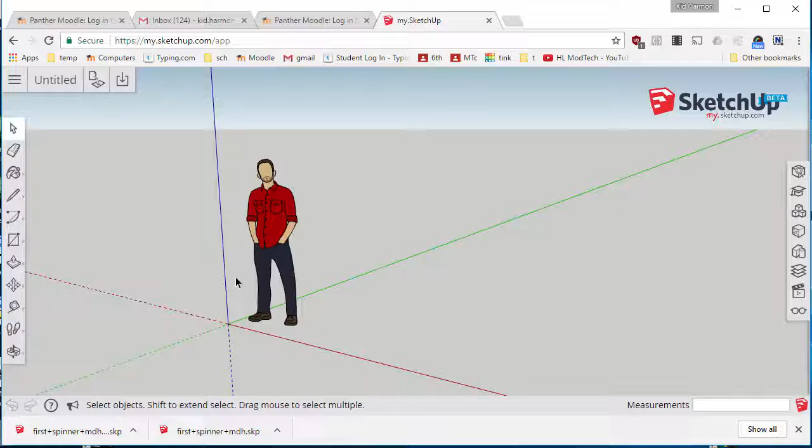Hey there friends, I showed you a minute ago a project where I had a fan knob that needed to be created, and I am comparing creating it in Tinkercad and SketchUp. First things first, I want to make sure that my SketchUp project is in millimeters. I'm not going to save the other model. Delete the dude, and I'm going to change the name. I'm going to get in the SketchUp folder, and I'm going to call it Fan Knob.

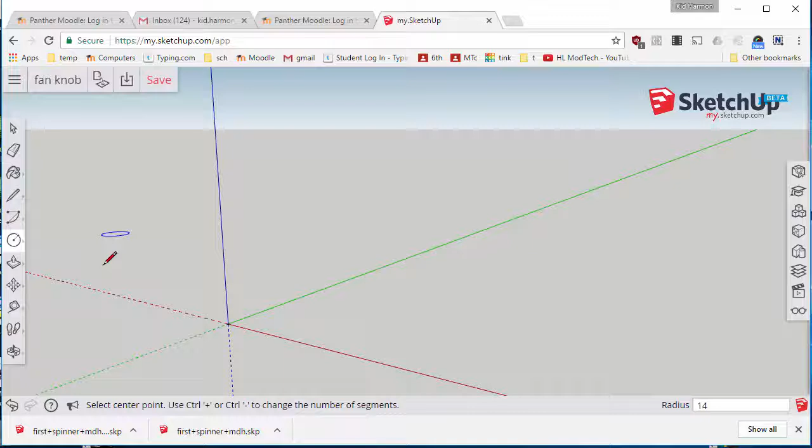The next step is I need to create the face. Now, my skills in SketchUp at creating rounded items aren't as good as they are in Tinkercad. But then also that's because Tinkercad has built-in tools to help me. So the radius, remember, was 28. Or the diameter was 28, so I'm typing 14, and then I'm using the wicked cool zoom to extents tool. I want to push this up 2 millimeters, so I'm going to do P for push pull. I'm going to raise it up 2 millimeters.

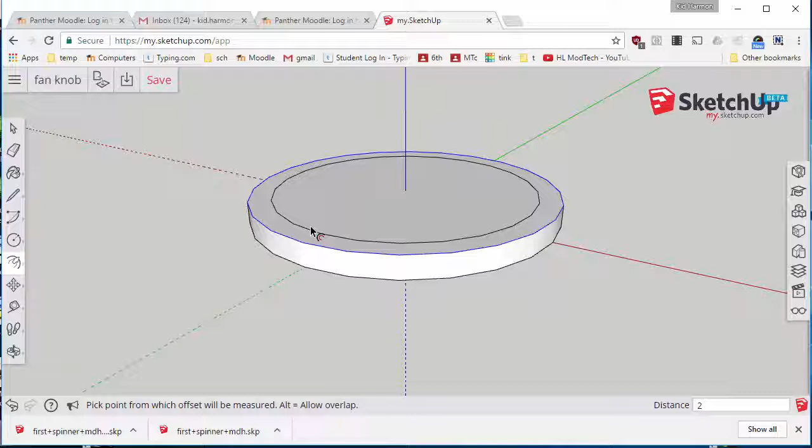The next step is I want to create that outside rim, and once again they have got wicked cool tools to make that happen. I want to grab the offset tool, which is on the push pull tool, offset. Now I want to make it 2 millimeters thick, so I'm going to hit 2, and that gives me the wall of 2 millimeters, and then I'm going to push this up, and I'm going to make it 11 millimeters total, but that would be 9 more than it was. So when I press 9 and press enter, that'll be a total of 11, and I think I want to go 0.5, I said. So I'm going to go 0.5 more.

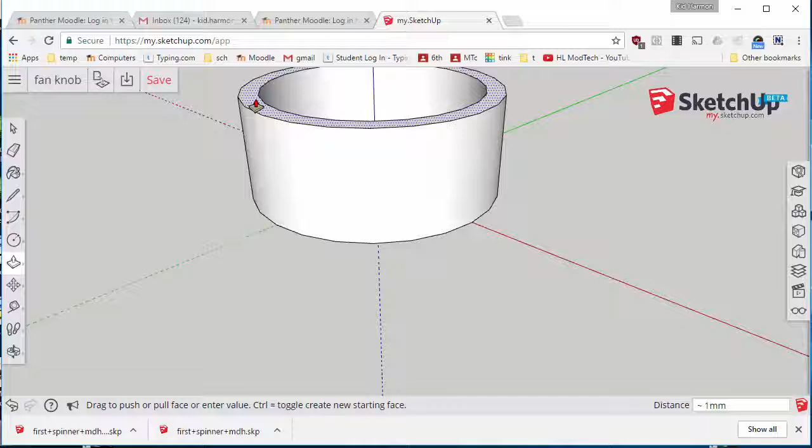Notice I always start it moving but then let go, so I'm not holding the mouse button, and then I can adjust and move where I want to. I'm going to use another cool trick. I'm going to infer to create the center of the next piece. So I'm clicking the circle tool. I'm going to the edge, and then that infers that I want to go to the center, and I want to create a 10 millimeter center post, and I'm going to type 5 because they ask for the radius.

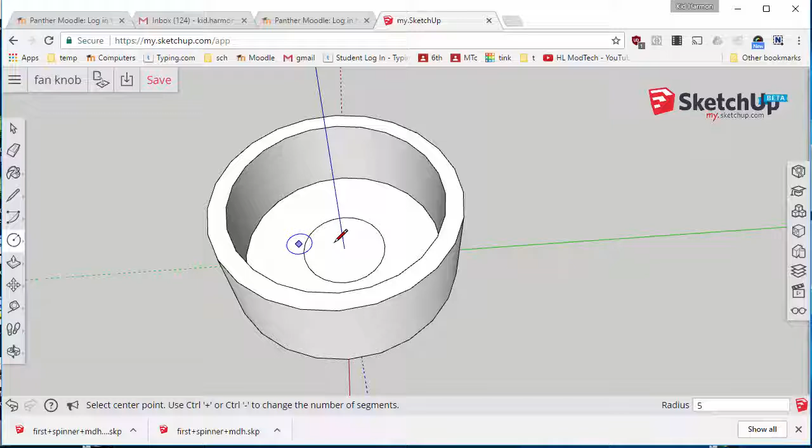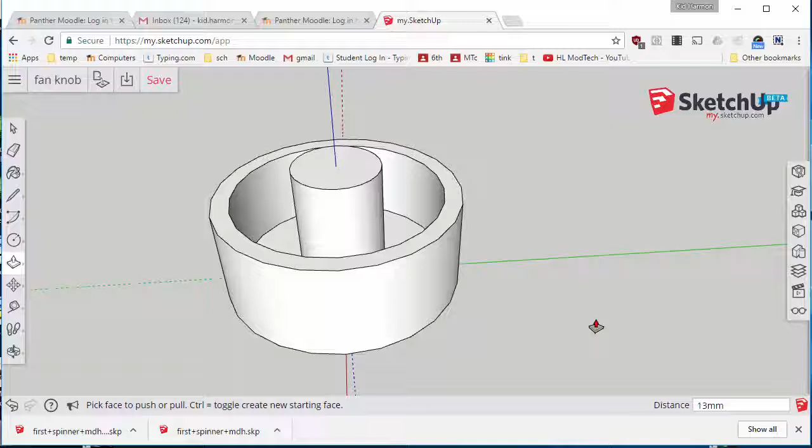I'm going to push pull that little fella up, and remember he goes a total of 15, so I am going to go 13 because I already went 2 millimeters. This one I was able to just click and go to. But usually I type it. That was just dumb luck.

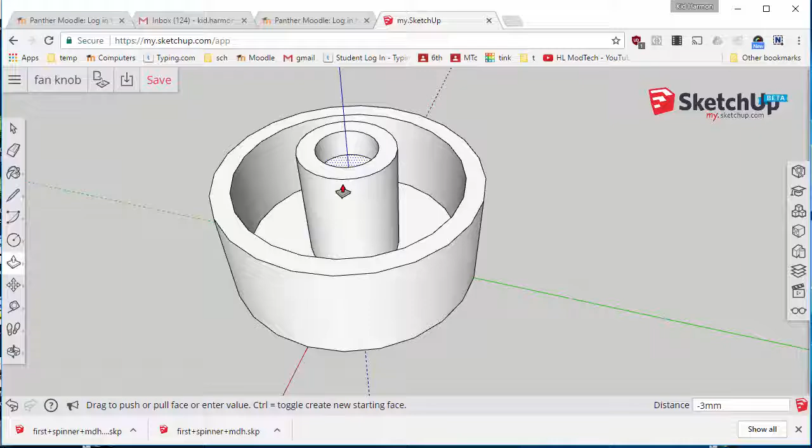And now I'm going to push the hole down in. I'm going to go back to that circle tool. I'm going to go to this edge, which lets me go to the center. Remember, this needed to be 6, but I wanted 6.3, so I'm going to do about 3.15 for my radius. And then I'm going to push pull that 3 down. And if I look inside, now I've got a nice flat shape.

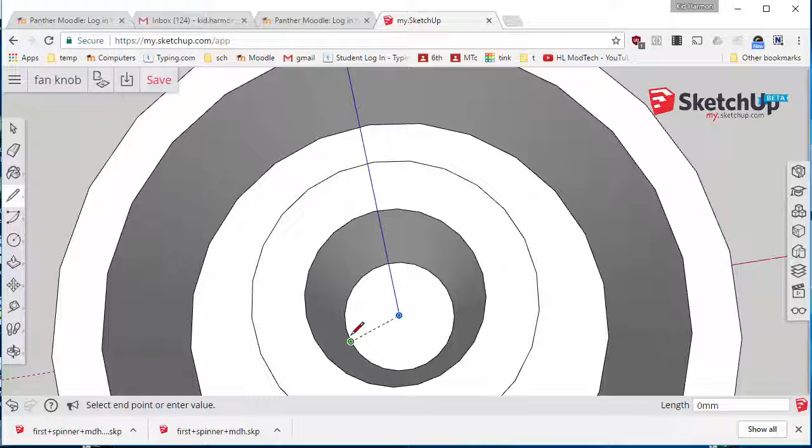Now remember, we had the 1 millimeter that we wanted to lift all the way up. I'm just making this a line across. Now remember, we wanted a flat piece, so what I'm doing is I'm just connecting a line across, and then I'm going to push pull that face, so I'm getting the dots on the correct face. And then I'm going to even be a little fancier. In the other one, in the real one, it only went partially up. I'm actually going to make mine look like that.

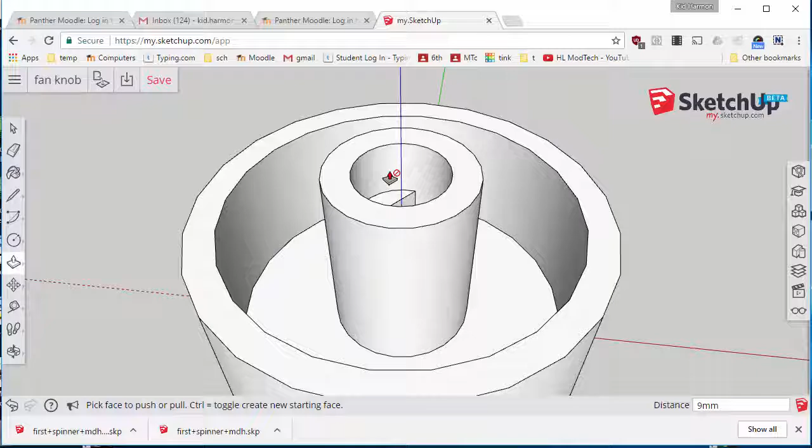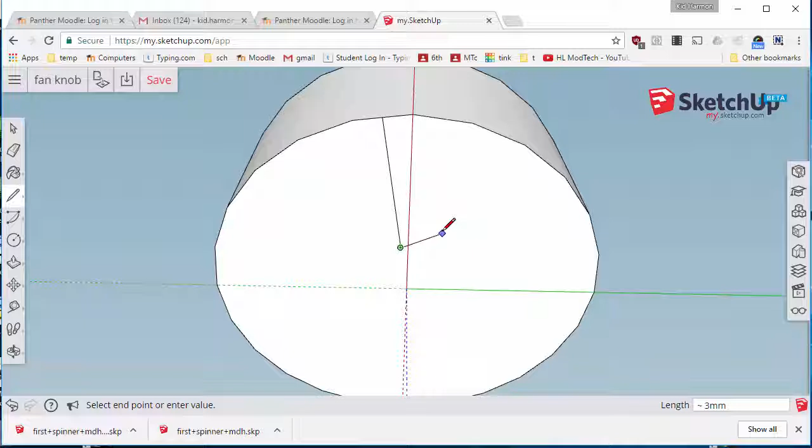So at this point, I have quickly created my fan knob. You can see both techniques are really slick. The one issue with doing it here is I don't have a way to really easily cut out that mark that was on this side. But watch this trick. If I draw a line, come out, go 90 degrees, and then come back, and this isn't going to be perfect, but now if I push pull that in, and I'm going to go 0.5 millimeters, it does give pretty much the exact same thing.

So there we go. I'm going to save that, and then I cannot export these to STL right now. I need to instead download the model to my computer, open it in the real SketchUp, and at that point I can set it up for printing and we can see which one prints better.

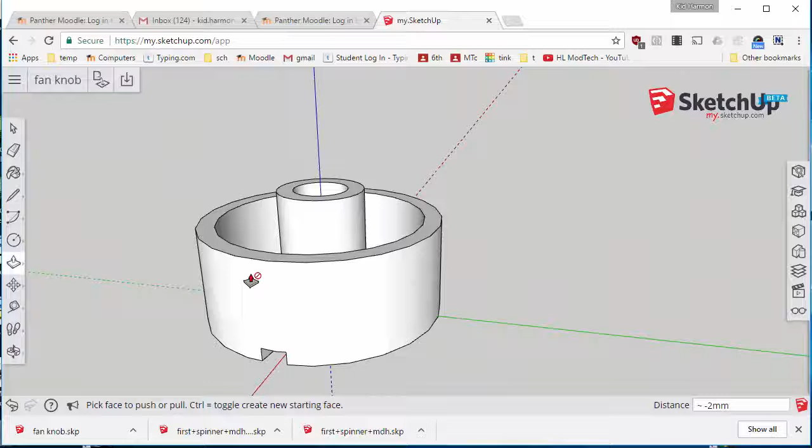Thanks for watching, and I hope you had fun. Hope it helped you see different ways that you can work with both tools.